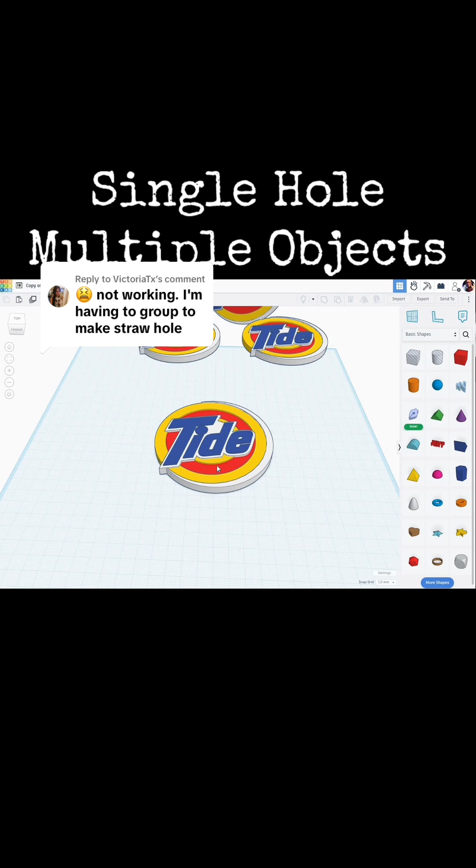TinkerCAD tip. Not long ago, we were working with these multicolor logos, and when we were designing them, we were intentionally keeping each of the colors a separate object. For instance, you see the blue here, that's one object, the white's another, red's another, and yellow.

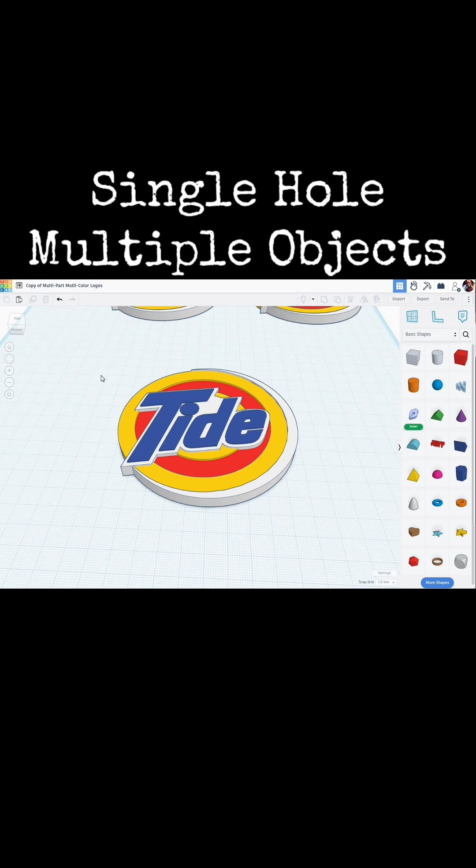And I had a user asking about putting a straw hole through it, I guess to make a straw topper, and it was combining all the parts together. Well, there's an easy solution for that. Let's take these here, let's select them all, and for the purpose of clarity, I'm going to stretch this up a bit. There we go.

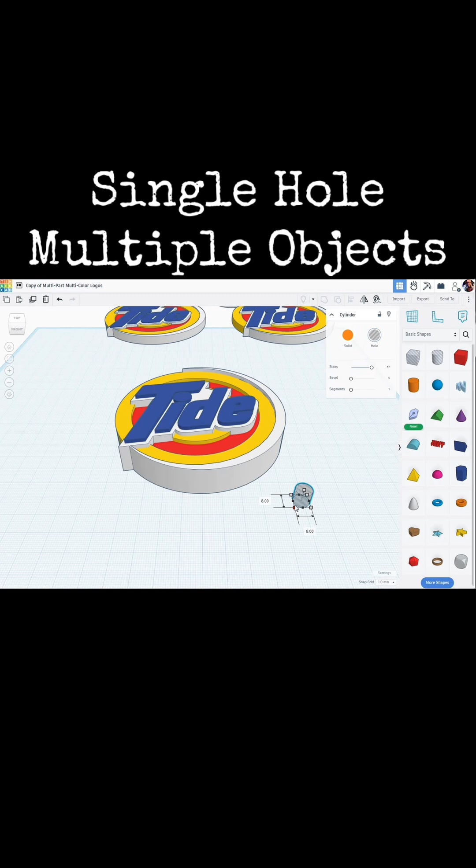Now I'm going to bring out a hole cylinder here. Let's increase the number of sides. Holding Alt and Shift, I'm going to reduce the size of this a little bit. Let's say 8 millimeters there. I'm going to stretch it up so it'll go from bottom to top. Holding down the Shift key, I'm going to rotate it so that it's horizontal.

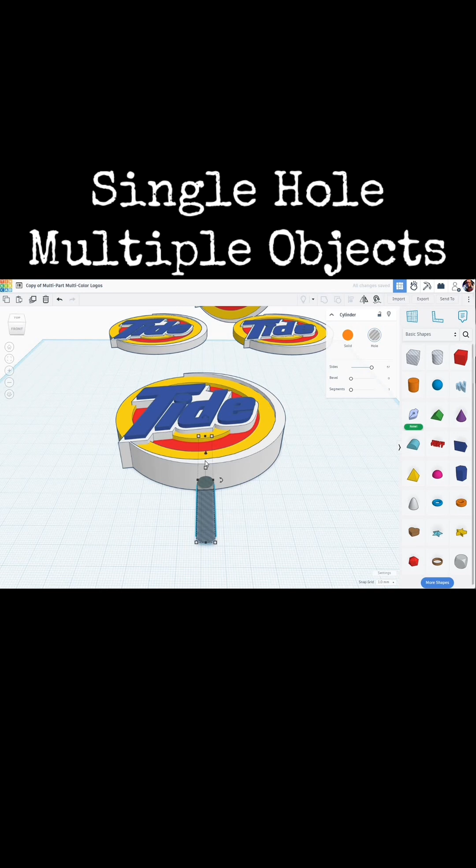Let's bring it down and over here. Now using the Control key, I can move this up to about where I want it. And then holding the Shift, we'll shift nudge it up a bit. Let's go ahead and stretch it so that it goes all the way through. Okay, I can see part of it in the red there, so I'm going to go ahead and click down a little bit.

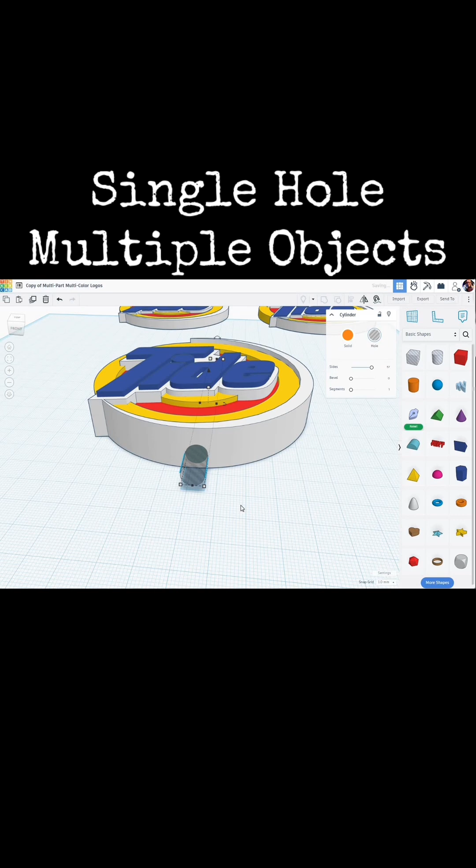Whoops, and over. All right, so the trick is here, instead of grouping all these together to make that hole, which would then group all these colors together, you want to make one of these hole shapes for each of the colors. There's 4 colors here. I have one hole here already. I'm going to hit duplicate up here, or Control D 3 more times.

1, 2, 3. Now what I'm going to do is I'm going to click down here and select one of those holes. Holding down Shift, I'm going to click on the white. While those two are selected, I'm going to group. I'm going to hit Control H just to temporarily hide that.

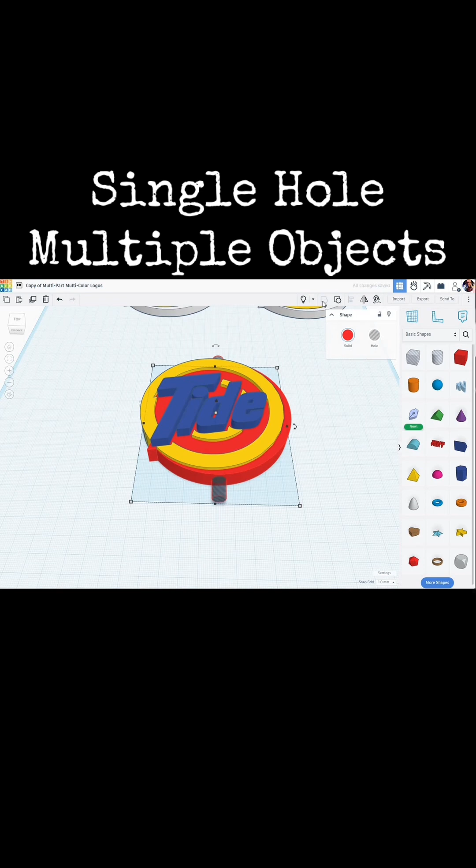I'm going to click on one of the hole shapes again. Holding down Shift, I'm going to click on the red. 2 objects selected, I'm going to group those together. Those are grouped. I'm going to hit Control H to hide. Click on the next hole. Shift select the yellow. 2 selected, I'm going to group those together.

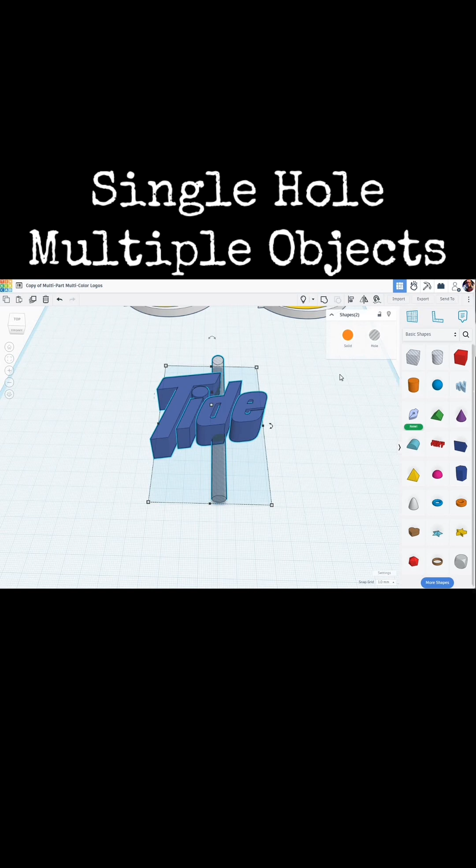Control H to hide, and there's my last one. Select that hole shape, the blue part. Group that together. There we go. Now I can hold down Control Shift H, bring all of those parts back.

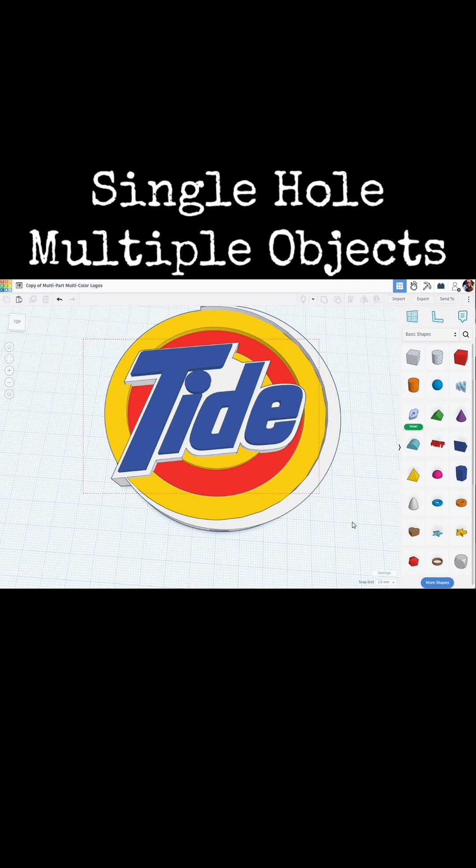And you can see here, now I have a hole all the way through, but yet I've maintained having each of these as a separate STL. That way you could select all of these and send them to your Bambu printer, and just assign 3 different colors to that. There you go, TinkerCAD tip, how to make holes without grouping all of those objects together.